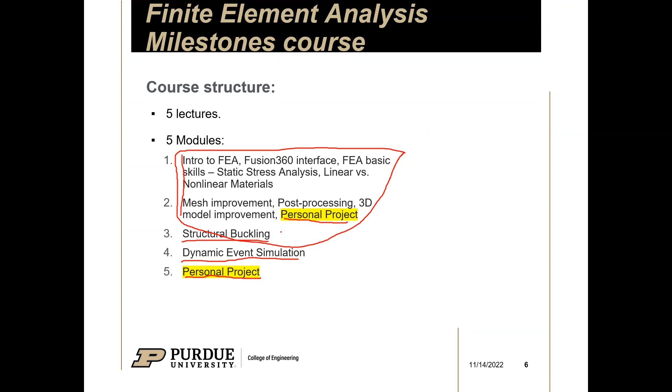And I understand that a lot of you might be doing an internship, taking summer classes and whatnot. You guys might not be very free. And because of that, I only require you guys to do these first 2 weeks and the 2 personal projects. Those are the only things you guys would have to submit. For structural buckling and dynamic event simulations, I'm going to open up a submission form, but you guys aren't required to submit anything.

All right, let me just. All right, we should be good.

So here's a bit on what I want you guys to do for both projects. Now this is very vague, and I'll get a lot deeper into it in week 2 and week 5 respectively when you guys are required to do that. But basically for project 1, I'm going to ask you guys to do a static stress analysis on a CAD model that you guys will make or you guys can find outside. And after that, I will ask you guys to do a mesh improvement on that. But you guys will figure out how to do that in week 2. So don't worry about that.

And for the second project, I'd like you guys to do a buckling stress analysis or a dynamic event simulation on Fusion 360. And why I dedicate the 5th week entirely to the second project is you will come to find that setting up a buckling stress analysis and a dynamic event simulation takes a lot more work than that of a static stress analysis. But yeah, I'll guide you guys through it. So hopefully it's not too challenging. And again, week 3 and 4, when we're going through buckling stress and dynamic event simulation, you guys aren't required to submit anything.

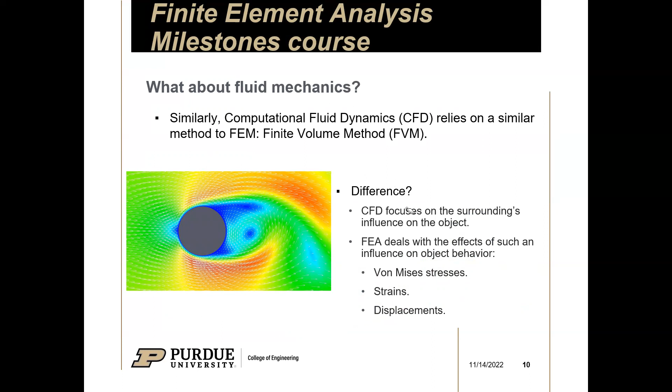Next. Okay. So you might be wondering about fluid mechanics, and that's another type of FEM called CFD, computational fluid dynamics. This talks more about how air and water will affect your CAD models. We're not going to do that at all. FEA deals more with physical properties like forces, pressure, moments, and whatnot.

Okay, I'm just going to go through this real quick. So how does FEM work? FEA and FEM are similar, so if I refer to FEM, it's probably the same thing as FEA and vice versa. How it works is you have a CAD model, and the software will split your CAD model into separate elements. Each element will be solved using partial differential equations, and they'll calculate things like displacement and stress and all that good stuff. That's basically it.

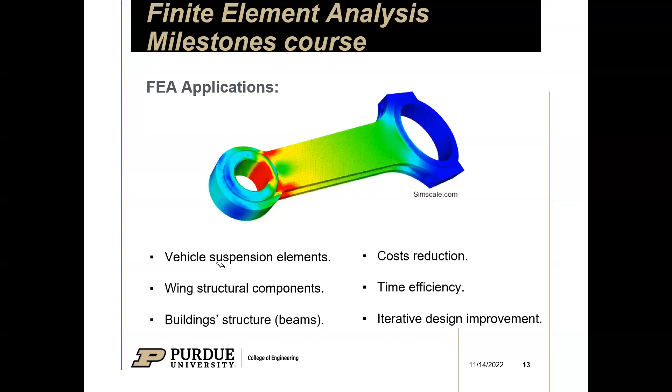And iterative design improvement is like generative design, if you've ever heard of that. Shape optimization is also a type of iterative design improvement, and that's something we're going to get into next week. Okay, cool.

So as you know, we're going to be using Fusion 360 in this course, but there are a bunch of FEA softwares out there, not just Fusion. For example, Siemens has NX, and for their FEA software, they have Star CCM. SolidWorks has SolidWorks Simulation. Autodesk has Fusion 360, and I'm sure you've heard of ANSYS before.

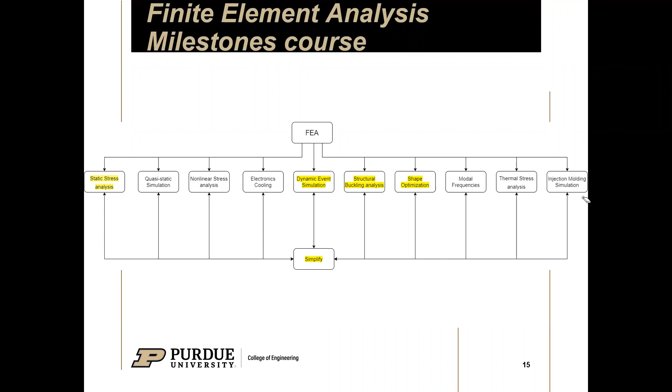But as you can see here, there are a lot of other ones you can get into. Unfortunately, we just don't have enough time; 5 weeks isn't enough to cover everything. But if you're interested, there are courses online you can take. Or if you're part of a club, you might need to do other FEA studies.

But yeah, so one of the most important parts of FEA is actually meshing. I'm sure you guys have heard of that a lot, right? Creating your mesh, this mesh, that. And basically what a mesh is: you're taking your CAD model and you're breaking it into parts. Each part here will be called an element.

And why we're separating our CAD model into elements is because now our software, or in this case Fusion 360, will be doing a bunch of partial diff-EQ on each element to figure out what the displacement at this specific element is, to give us accurate results basically, and sort of predict what's going to happen to our CAD model in real life if we were to subject it to certain forces or moments and all that.

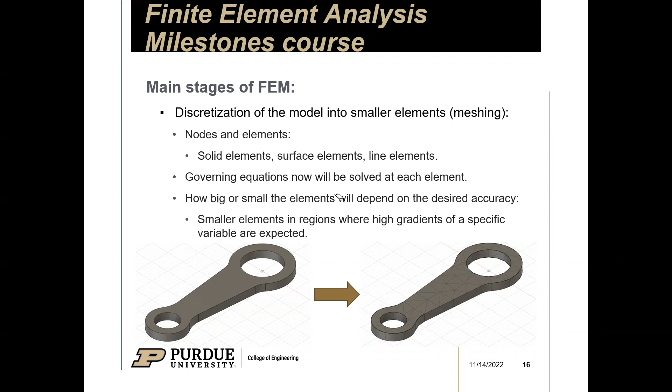So if you guys see here, we can change our mesh settings to make our studies more accurate at the cost of time, right? So I'm going to show you guys what I mean. So here's our CAD model. This is the roughest mesh we could get.

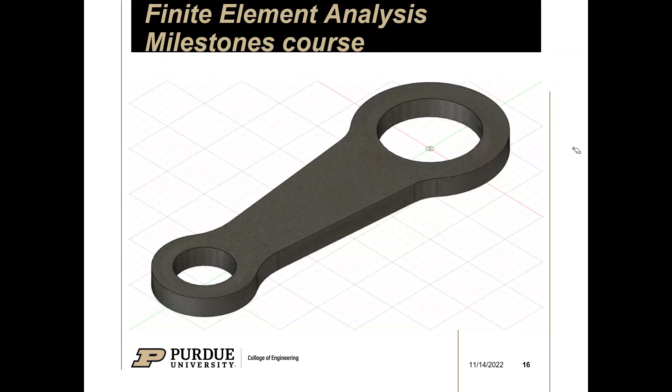But if we want a more accurate result, we could split our model into a lot more tinier elements. And we can do that up until we have this, where it's very hard to see each element now, because there's probably like millions of them. And Fusion will take care of everything basically. For every dot you see probably, Fusion will run a bunch of partial diff-EQ equations on it. Sounds like a nightmare, but thank God we don't have to do that, right? So that's the point of this course.

All right, so another important thing within FEA is for us to define our materials. Of course, if we're going to run a study on our model, Fusion needs to know what exactly we're dealing with, right? So some important properties that Fusion needs to know are a material's density, Young's modulus, Poisson's ratio, and more. And you guys don't have to search it up yourself, because Fusion sort of has a library with a bunch of materials already. So that's good for us.

And of course, next to that, we have to define our boundary conditions, right? For example, the part earlier, let's say we're dealing with this. If we don't fix anything, if this is just free and we add a force here that pulls our part to the left, nothing's going to happen, because if you think about it, the entire model is going to move along with it, right?

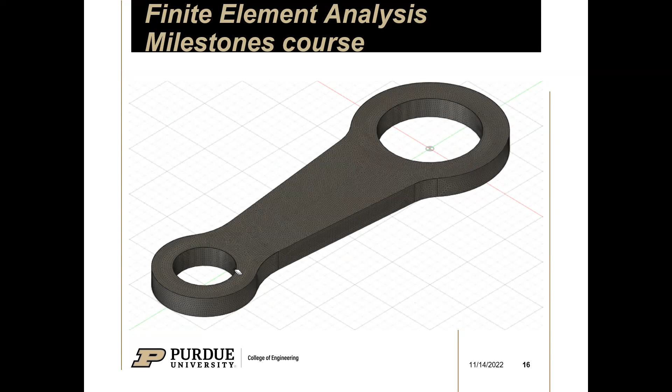So what we'd like to do is fix a part, or make a pin joint or something. So let's say we fix this big hole over here and we add a force here that pulls to the left. Now we'll see something happen, like maybe we'll see stress buildup over here, and some displacement over here. But yeah, you have to define your boundary conditions when you're doing an FEA study. Constraints and the loads are probably the two most important boundary conditions you can have.

And contacts aren't very common, especially not in this course. Actually, scratch that. It's quite common, just not in this course, because contacts are used for an assembly. Say we're dealing with a table: contacts let Fusion know the leg and the table itself are in contact with each other, right? So that's basically the entire point of contacts, but we're not really going to deal with that unless you guys choose to do so for your personal project.

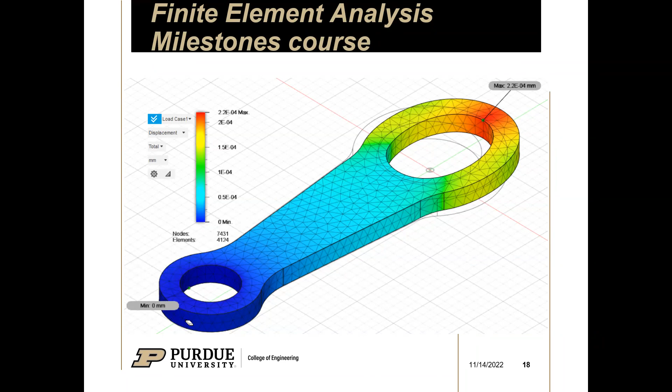And I just want to say that this is exaggerated. You guys see the number here? It's a very small displacement. You probably can't see it with your own eyes, but Fusion likes to exaggerate it, so you'll know, if you keep increasing your load, what exactly the displacement will look like, right? And what's nice is, as I said earlier, you can see the maximum and minimum, and this color gradient really helps you visualize your results, basically. But yeah, sorry.

And some additional steps. All right, so here, shape optimization is something we're going to do next week. What it basically does is when you get your results like this, and you have a safety factor of 15, which is to the point where it's too good. We're usually looking for somewhere around 1.5. So 15 means you're really safe. Fusion will give you recommendations here: use shape optimization to remove unnecessary material. We're going to get into that next week.

What shape optimization basically does is Fusion will run the study on your model, and it'll show you, using a new mesh, parts that you can cut away that will decrease your safety factor, but will help keep you within a range you specify, right? And another way you could decrease your safety factor is, of course, using weaker and cheaper materials, like switching from metal to plastic, right? Cool.

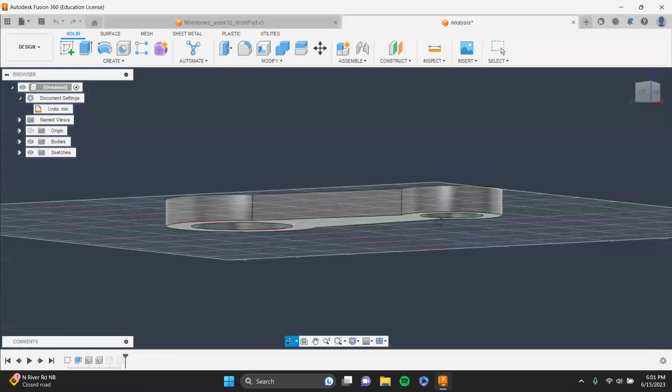So now we're going to analyze the 3D model. Just by looking at this model, you guys tell me where the weak zones are. If you guys didn't know, stress likes to build up usually on edges and corners, like these points over here, sharp corners here. Stress builds up there. And a good way to minimize stress and minimize your weak points.

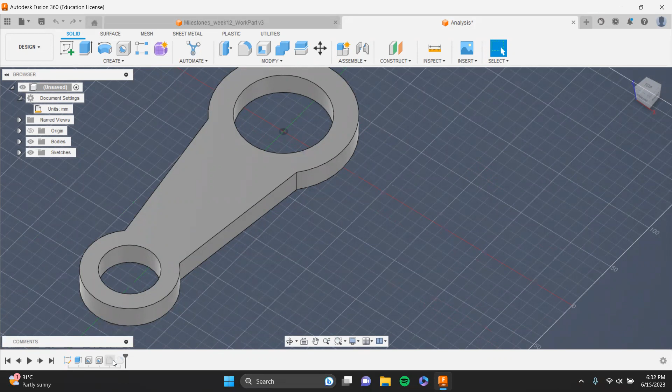Down here, we have two fillets that are suppressed. If you guys unsuppress that, you guys will see that now we have curves. Basically, what this does is make sure that we have no stress buildup at any specific point within the model, right? That's basically all I wanted to show you. Please do unsuppress these two features, these two fillets, when doing your analysis in a bit.

I'm gonna keep going here. Okay, sorry, I went through that already. Okay, now's the fun part. Let's start creating our study. So first thing we want to do is switch our workspace from design to simulation and create a new study. I'm gonna go through along with you guys. So you're gonna go here. You're gonna switch from design to simulation, right?

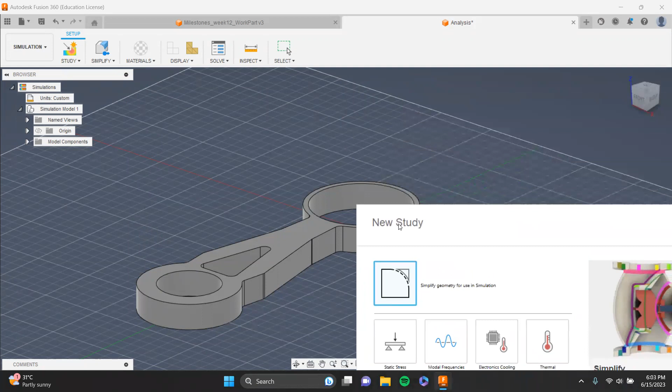So I made a mistake sending you guys the file, because if you go to the simulation here, you can see that it's a whole different part we're working with, right? That's a part that I edited last semester. So we're gonna fix that first. What we're gonna do is go to simplify model here. If you guys can see on the bottom, there are these sort of edits to the model.

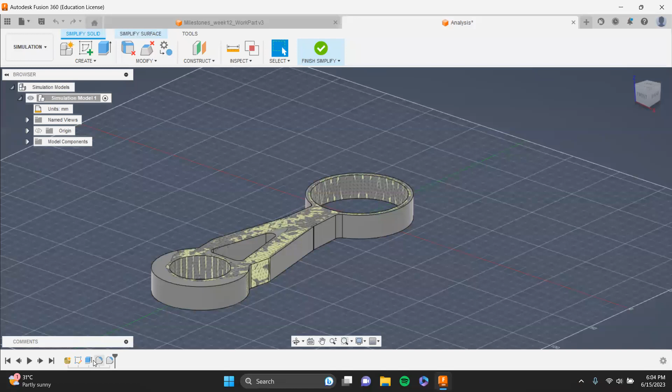Please do delete all of them. You're not going to be working with this part. We're going to be working with just the ordinary part, the one you would see in the design workspace. And once you're done with that, please do finish simplify. Up to this point, do you guys have any questions? Okay, cool. Doesn't seem like anyone has any questions, so I'm going to move on.

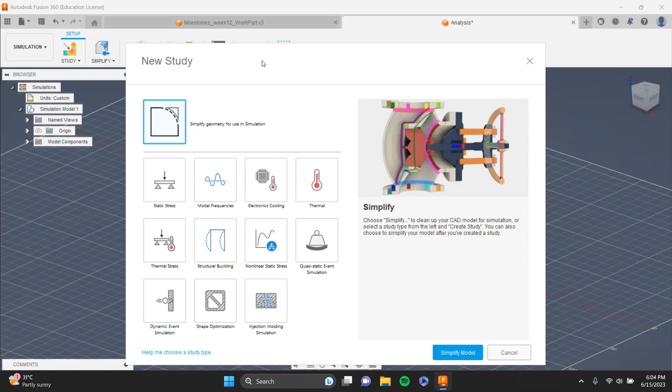You can see here there are a bunch of studies you can do through Fusion. Static stress, which is what we're going to be doing today. Modal frequencies. If you're dealing with electronics and want to see thermal stresses, you can do this. Week 3, we're going to be dealing with structural buckling. Week 4, dynamic event simulation. And throughout weeks 2 and 3, we're going to be doing shape optimization, but we'll deal with that next week. For now, I just want you to click on static stress and hit create study.

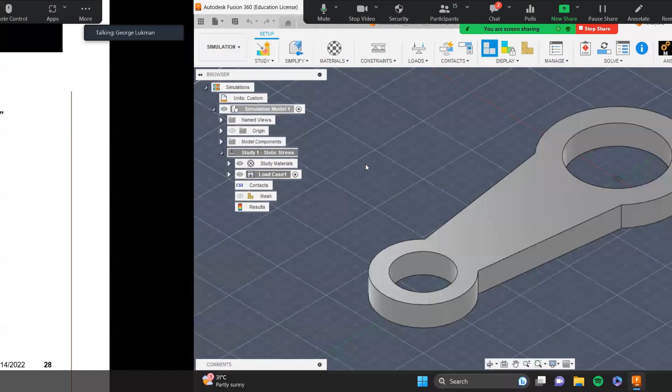And I'll go back to our slides for a moment while you guys are doing that. Cool. And again, I showed you guys the simplify tool, and why it's useful is you guys can change your model up without actually changing the actual model on your design workspace. Like you saw earlier, in our design workspace, we had this sort of basic model. And right as we entered our simplify workspace, it was a whole different model, right?

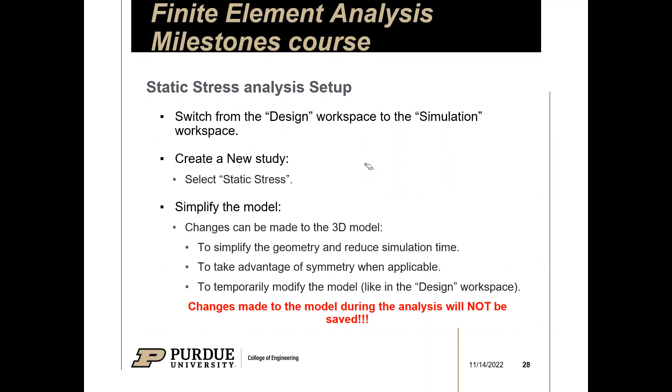So take advantage of that when you guys are done with this course, or using FEA now for your clubs, jobs, whatever you guys are going to use it for. Take advantage of that, play around with it if you guys want to change some things up just a little bit without actually changing your CAD design, right? That seems very useful. But yeah, okay. There you go. Cool. Let's keep going now, right?

Alrighty. Now we're here. Okay, we go to materials here. This one over here. We can click the drop down. There's a bunch of things you guys can go look at, but this is enough. Study materials, click. Now we see here our study material and from what library it's in. But we'd like to change, okay, and there's like a bunch.

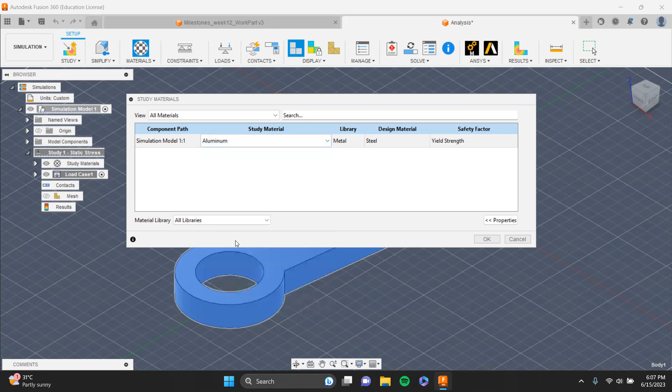We'd like to change it now to aluminum, right? Just change it to aluminum. That's what we're gonna be using. Click OK. It should turn white. That's the color of aluminum. Another way we could do it is by hitting study materials here. It's going to take us to the exact same interface we saw earlier. But yeah, you guys can pick, right? It's the same thing. Once you guys are done with that, you guys are good. Let's keep going now.

And the next thing we'd like to do is apply our constraints, right? We'd like to apply our fixed constraints so that when we apply a load, something will actually happen. What we're going to do now, we're going to fix the interface of our bigger hole, right? And we want to make sure that it's fixed in the X, Y, and Z axes. I'm going to show you guys here actually. So you want to go to constraints here. You guys can drop down here, but for the most part, we're just going to use the basic constraints. So just click on that.

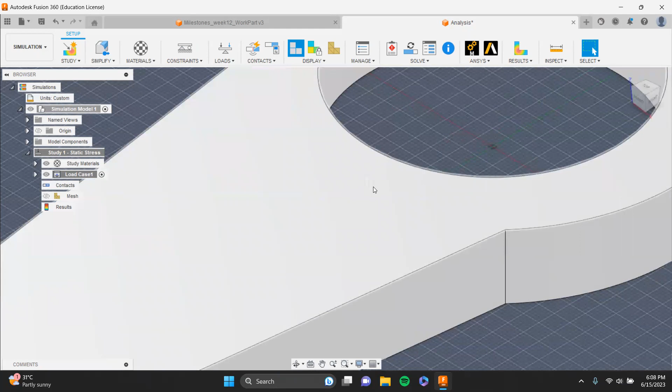And you guys can see the different types of constraints you guys can apply to your model. We're just going to use the fixed. We're going to apply it to the inner circle of the bigger hole. I'm going to click that. Make sure all three axes are highlighted. We're going to click OK. How you guys know you did this right? Because if you zoom in, you guys can see this lock is actually locked. Probably hard to see. Let me do this. Cool. Yeah, it's probably easier.

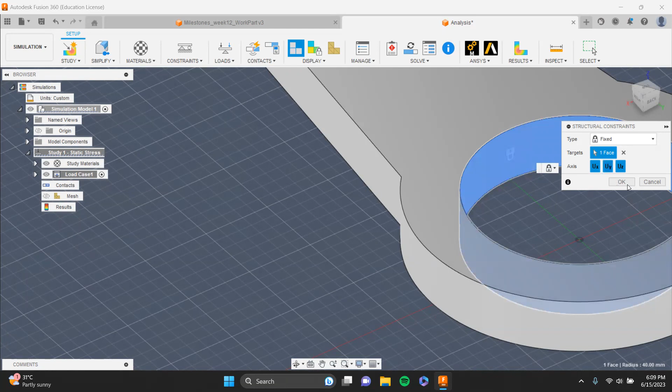Now, if you guys did this wrong, say I just fixed the X and the Z axis, what you guys will see is your lock is unlocked. What that means is it can still move in the Y direction, right? But that's not what we want. So let's fix all three axes. Cool. Let's just go back here. Alrighty. So now we're going to move on.

And for the angle, it's a bit different; everyone might have different ones. So I'll just show you guys what the direction of the force is supposed to look like. Okay, so now we're back here. Again, the interface of your bigger hole should have a lock on it, right? And that's how you do it. So go constraints, fixed, and select that.

We've done that. Next, we're going to apply our loads again. Use the drop down. Again, it's this introductory course, so we're going to use the most simple one. From type, pick force, right? Not remote force, not moment pressure. We'd like to use force. For our target, please pick the interface of our smaller hole. We click that. And this is the direction we'd like to use, right?

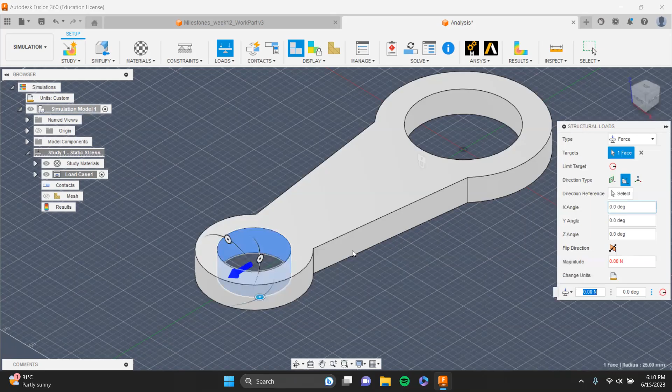You guys can see earlier, it says we'd like the X angle to be 180 degrees. But if your direction's already pointing outwards like that, please do not change it. This is what we'd like to see, right? Out. If you guys have a force that looks something like this, then please do change it or use the dragging tool here to drag it outwards. Okay, this is the direction we'd like it to be in.

And we'd like to change our magnitude. We can change our magnitude through here or here, doesn't matter. Make that 1000. We can change our units, by the way, but let's keep it in newtons right now.

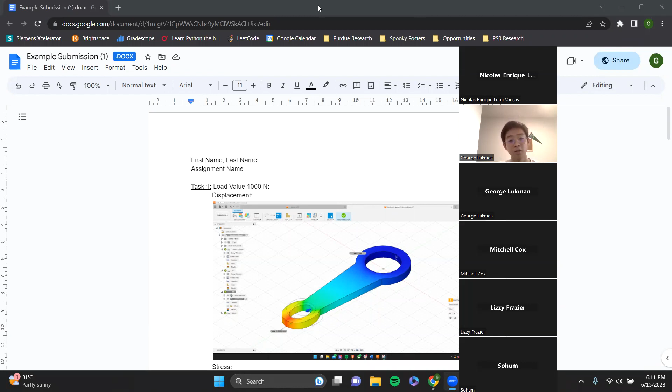Click. Can I get a raise of, oops. Yeah, actually, can I get a raise of hands on if you guys are done with this step? Actually, thumbs up or a raise of hands would be good. Yeah, okay, I see you, Nick. Sohum, thank you. All right, thank you, guys. Thank you so much. All right, it's like we're doing well here. What? Okay, sorry about that.

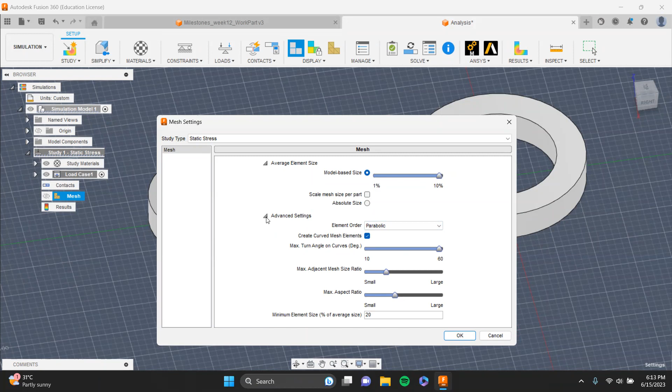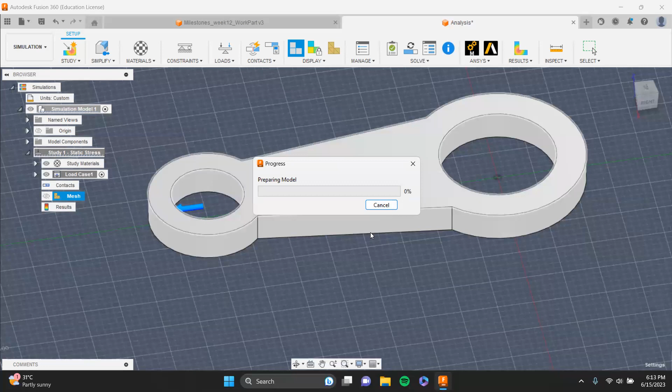But for today, we're just going to be dealing with model-based size, and let's keep it at 10% first. We're going to click OK. Now, we're going to click this button here. It's basically going to create the mesh for us. Might take a bit. Cool. Now, if you guys can see here, our model is now split into separate elements. Each triangle here is an element, right?

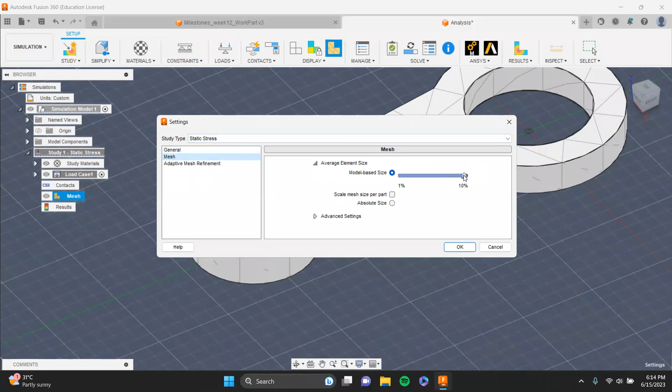Cool. Now, we could also go to mesh from here. Drop down over here. Let's go to local mesh control. That's if we want to change our mesh at a specific designated area, like if we'd like to change our mesh here or here. That's not what we're going to be covering today. We could simply go to settings, click here, and down here we have mesh. We could also edit our mesh through here, change it to 1%, right? And just click OK here.

And if you guys can see here, Fusion is giving me a warning. It's telling me it's out of date. That's why we'd always like to generate mesh. Every time you change your mesh, just make sure you right click here and generate mesh, just to be sure you're dealing with the most recent mesh you picked. If you generate mesh here, this is just an example, at 1% it's going to be a lot finer, as you'll see in a bit. But the downside is when we analyze our study, Fusion's going to take a lot more time to solve it. Look at that.

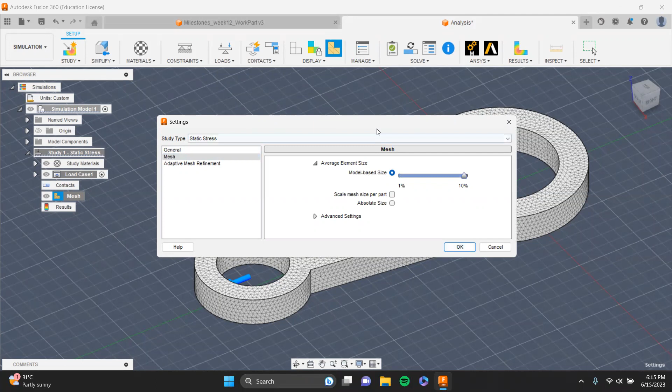Now, each element is this individual triangle here, and Fusion has to solve for a bunch of them, right? But please change this back. Actually, let's change this back to 10%, so your studies won't take a long time to solve, especially since we're dealing with a part that's not too big. We don't really care how accurate our results are, though I will be asking you guys to play around with the mesh in a little bit. But for right now, just keep it at this 10% mark because it's enough.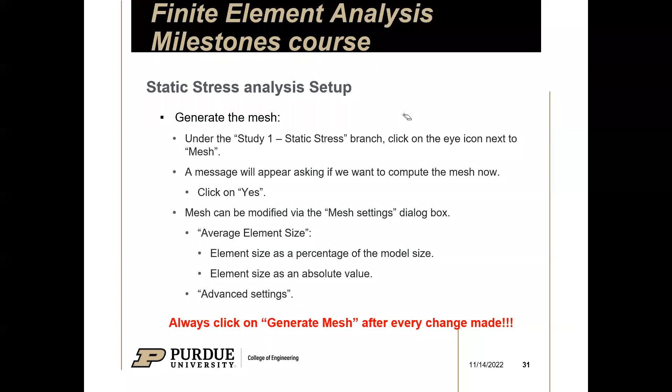Cool. So next thing we'd like to do is to use our pre-check tool, which is one of the most important and I guess one of your biggest friends when using Fusion's FEA. And why that is, the check tool actually lets you know if you're good to go, right? So if you set everything up right, this is what you should be getting, which is a check. This means you're good, you're ready to solve.

Whereas if you forgot to do a step, this is the interface you'll be introduced to. And Fusion usually is able to catch what you're missing. For example, here you're missing a structural load, so Fusion will be like, hey, maybe you're forgetting to set up your load. But if I swipe back here, we look at our pre-check tool, which is over here. You can see it's green, right? Of course, if you hover over any icon, it tells you what it does. But all right, back to it.

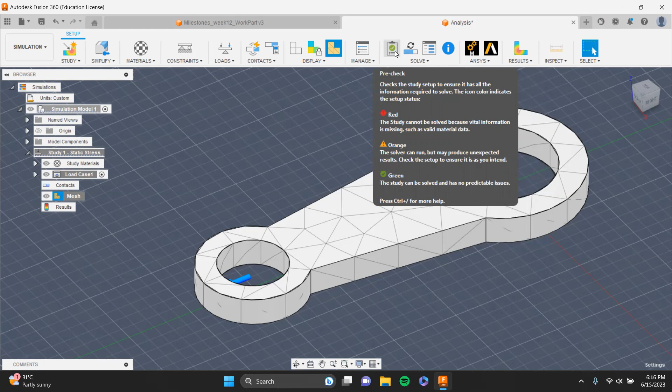Our pre-check tool is green, which means we set everything up right, and Fusion's telling us you're good to go. We can solve whenever we're ready. It's not giving us any warnings at all, so we're ready to solve. So once we're done with that, we're gonna solve. Solve is right here next to pre-check. It should say ready. Once you're done, just click solve one study.

It's gonna ask you to name it. Just name it whatever you'd like. I'm not too picky because I'm not gonna ask for the file. But yeah, it's going to give you the status. By the way, it might take about 5 to 10 minutes, so please be aware of that and please be patient. But that's basically how you would set up a static stress analysis.

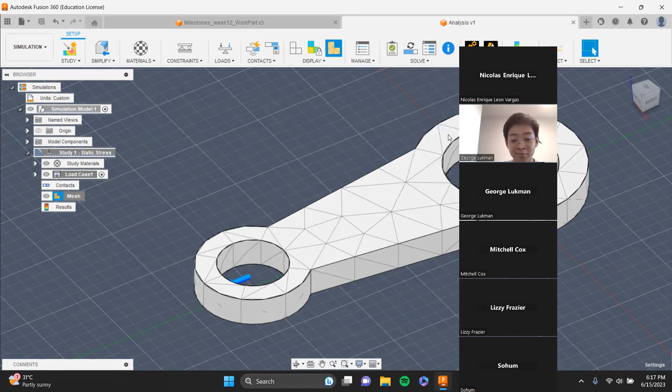Up to this point, does anybody have any questions? Probably went through that really quickly, so if you do, I don't blame you. Okay, cool. Looks like we are good.

And by the way, if you want to check on your study, like earlier, I just clicked X. Now I don't know where to find my study. One thing you could do is go to job status. It shows you that you're 30% done. Another way you can check is here. It's a lot less intuitive. You can't tell that's 30%, but it shows you that it's still in progress. So go back here and okay. Let's wait for this to solve so I can show you the results tab. It shouldn't take too long.

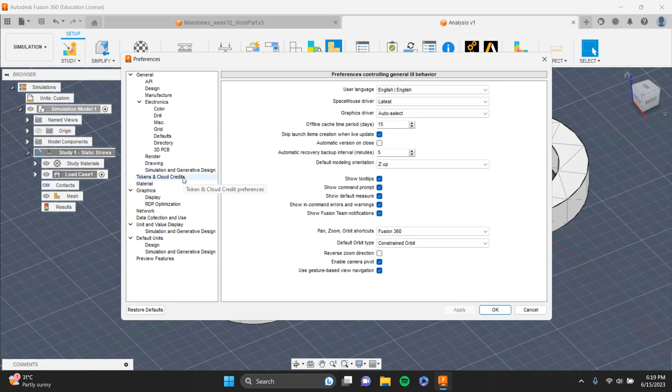So while we're waiting for that, please follow along because this is very important. Please change your account here. Click up here and go to preferences. Once you're in preferences, please go down to tokens and cloud credits. Up to this point, are you able to follow? Because this is really important. Give me a thumbs up if you're here. Cool, thank you. All right, I'm gonna keep going.

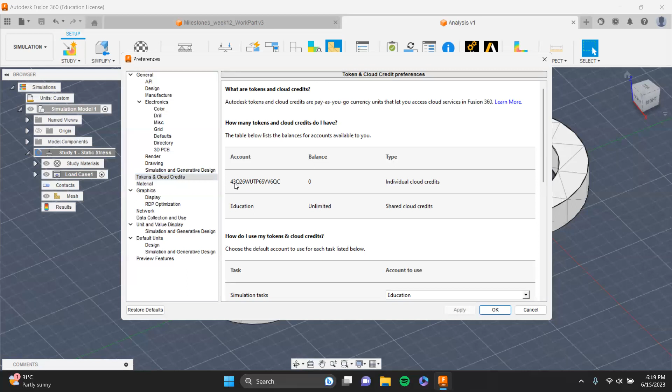Once you're here, you can see you have your personal account, which is a bunch of weird combinations of letters and numbers. And as you can see, my balance is 0. If you're using the FEA tool for the first time, maybe you should have like 5 or 6. But you can see here, you have another account called education. You would get this account if you signed up using your Purdue email, which I'm assuming all of you have. With your Purdue email, you'll get an education account with unlimited balance.

Now, why this is important is because usually this is set up as your personal account by default, and you will need to change it yourselves to education. So just do the drop down, instead of having this 4-3Q or whatever combination you have, please switch to education so you have an unlimited amount of credits.

And I'll wait for like 5 seconds. And if you guys are done with that, can you please give me a thumbs up so I know you guys are able to do so.

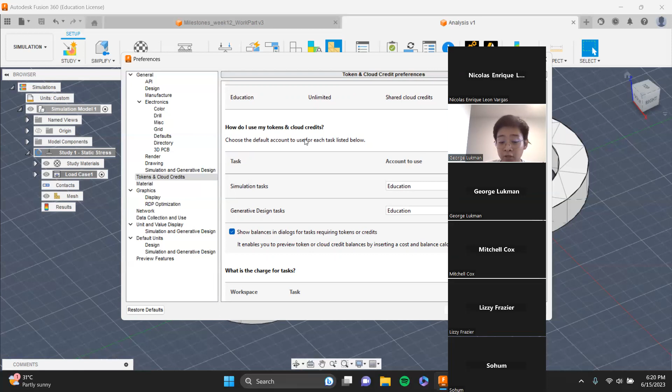And this is important because next week, when we do shape optimization, we're actually going to need about three cloud credits per shape optimization, and we'll need to do like 4 or 5 shape optimizations. So if you guys don't switch it to your education accounts, by like the 3rd simulation, you guys will be out of cloud credits, sorry. But yeah, thanks for the thumbs up, guys. That's really important that you guys switch to this.

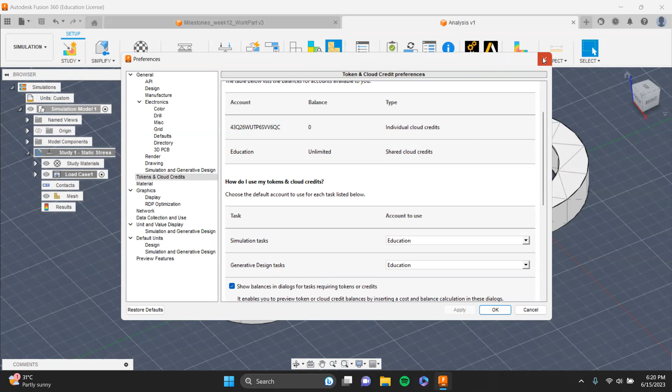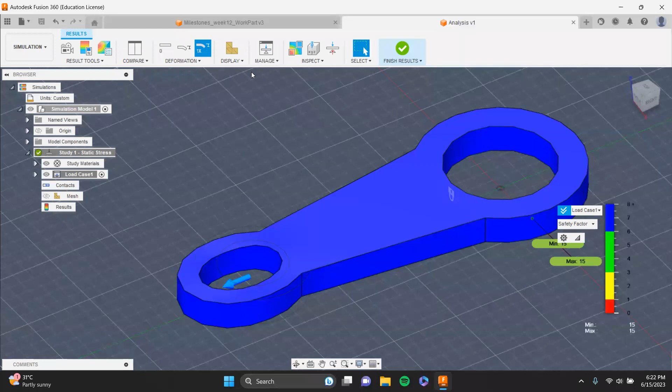Okay, and I'm gonna walk you guys through how you guys can use each and every one of them because it's very important. And I guess I could use displacement because it has the color gradient, which makes it easy to see. Now, first things first, you guys can take a look at displacement, safety factor, stress, reaction forces, and more. But for the most part, in this class, I only want you guys to go through safety factor, stress, and displacement because those are what I'm requiring you guys to send me for your submissions, right? I want to see safety factor, stress, displacement. Okay. And then results tool here.

Bunch of things you can do, right? You guys can play around with the slider here. So, yep, you guys can do that. And again, here you can check the undeformed, actual, and adjusted. So here's what I want to show you guys. So this is our undeformed model, right? This is what our model will look like. I'm gonna go to our view here. And if you guys actually see the actual, you guys can't really see a difference. Now I'm gonna zoom in a lot here, just so you guys can see maybe a little bit. That's how much deformation our model actually has with 1,000 newtons of force, right? It's not that much, but somehow Fusion showed us this, right?

So please be sure to switch to actual. Or, yeah, okay, sorry, someone put something in the chat. I will take a look at that in just a bit.

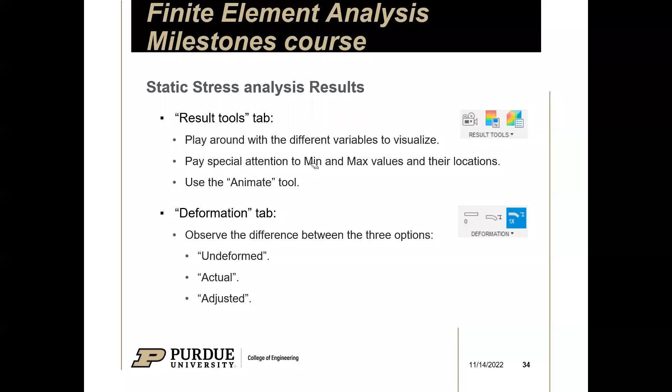But yeah, so please be sure to switch to actual if you guys want to see how a specific force, pressure, or moment will affect your model, right? Cool. And is there anything else I was missing here? Oh, the animate tool. Yes. So you guys can also animate here what will happen to your model, right? There you go. Kind of cool. I don't know. But yeah, those are a few things you could do with your results in the results tab here once you're done doing your study.

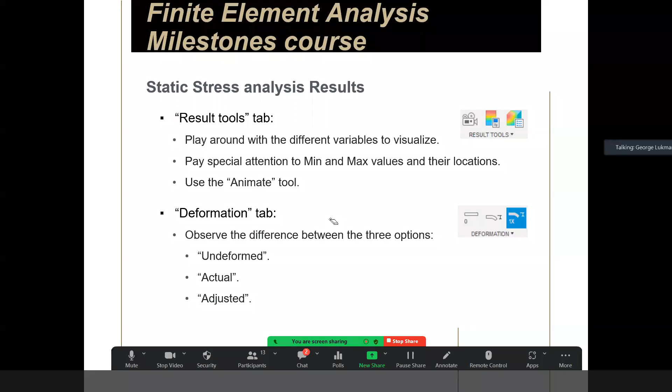Okay. Other things you could do here, oops, sorry, with your results are you could hide your minimum and maximum. You guys can try it out, but please turn it back on because I'd really like to see these values when you submit your work. And of course, you guys can create a point probe here. And here you can actually see what the stress is at this certain point.

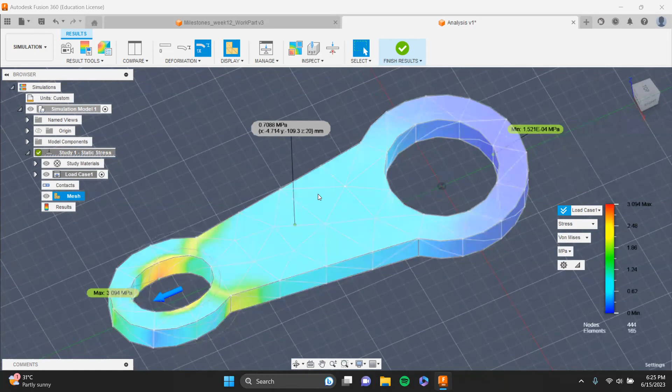And why that's possible is because earlier, sorry, not Fusion, earlier we created a mesh, right? We created these meshes here. So Fusion is able to tell at this point, at this quote unquote element, what the stress is or what the displacement is and all that, right? But yeah, those are a bit of what you can do with the results tab in Fusion.

All right, so now we are going to go to our assignments. So what you guys saw earlier, I'd like you guys to do 4 things. Well, 3 things in total. If you guys followed along with me as we created and set up the study, this counts as 1. I'd like you to provide me 3 screenshots. So 1 screenshot of the safety factor, 1 screenshot of the stress, and 1 screenshot of the displacement, right?

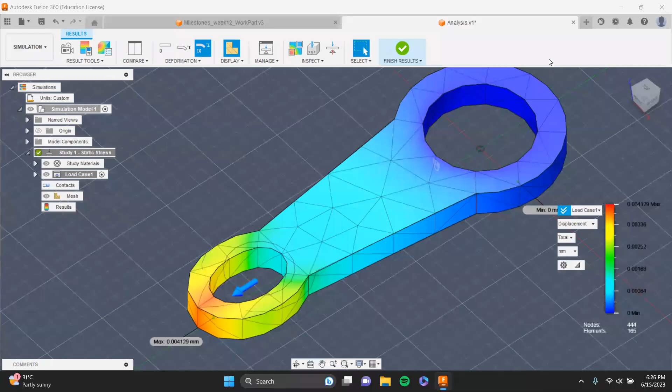Once you're done with that, click finish results. And please don't edit this, right? Don't go down here, go to your loads and edit your load, right? Please keep it as is. What I'd like you to do instead is right click on that and clone study. Once you've cloned your study, everything will be exactly the same, right? You create your mesh here, it'll be the same.

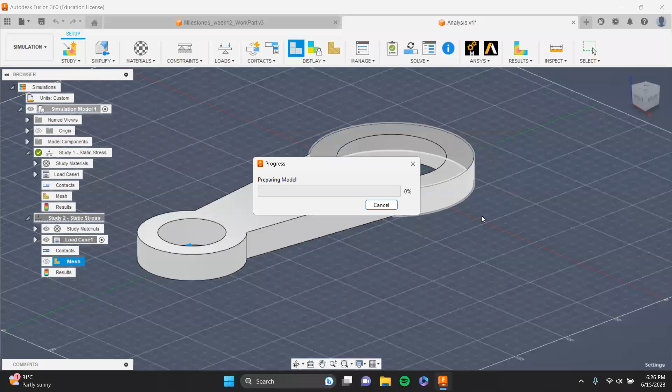Sorry, give me a sec. But again, we'd like to change the value of our load to 5,000 newtons. And I'll let you guys figure out. No, actually, let me show you guys how to do that. And for the rest, I'll leave it to you guys to figure out how to do it. And I'll be back in about 5 minutes to show you guys how to do it. And please do

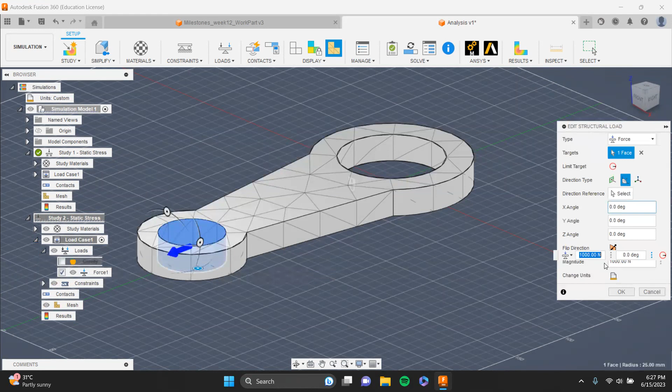screenshot the results. So once you've cloned your study, right click on study one and clone study, right? You get this. And then once you're on your study two, you'd like to click this drop down, go to loads, drop down again, and go to force. You want to edit. You can double click or click this edit button here. And you want to change your magnitude now to 5,000, right? That seems very simple. Enter 5,000, you should be good.

And earlier, I taught you guys how to change the direction of your load, right? Change the angles, basically. And so there's no confusion, I just want to let you guys know. This is one. So 1,000 earlier, like I mentioned. You do this, give me 3 screenshots, good. Change the load to 5,000, give me 3 screenshots of this, good. Now change it to 10,000, give me 3 screenshots. That's good. So that's 9 in total.

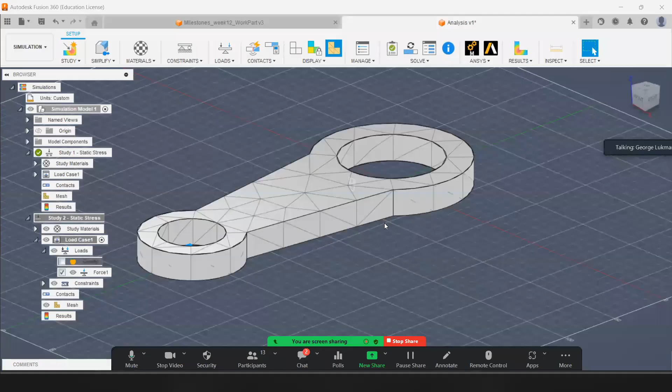And then I'd like you guys to clone another study of 10,000. And instead of changing the magnitude, change the direction, right? Change this direction to include a Y angle of 90 degrees. And again, I told you guys earlier that the angles might be a bit jumbled up based on your own Fusion. So here's the direction I'd like you guys to have your 90 degrees in the Y-axis to look like.

Right click here, edit structural load. I'll do it 2 ways, so it's intuitive, to have it as 90 degrees here, which you guys can use the slider here, around here, 90 degrees. So it's pointing downwards. How do we fix the model to the correct one again? Okay, so yeah, let me show you guys how to do that. And another way to do it is just by manually typing 90 here.

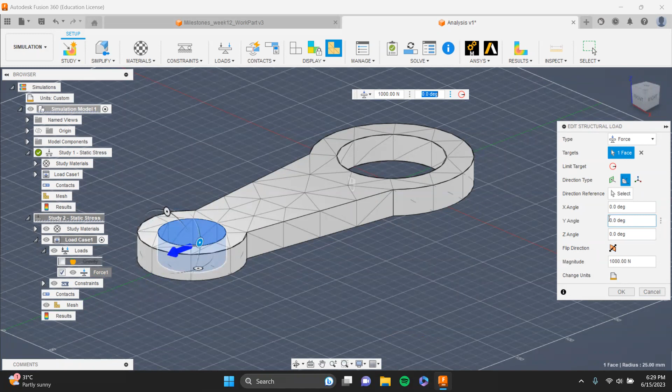Okay, so how do we fix the model to the correct one again? Are you talking about the constraint? How do we constrain the model? No, my 3D model is the weird one with the hole in the middle. Oh, okay. I see what you're talking about. So how you do that is you want to go to simplify here. And when you go to simplify, because I removed it, there's nothing for me, but you should see a fillet and an extrude down here. Do you see that?

Oh yeah, I see. There's 2 fillets and 1 extrude. Cool. If you could right click on each of them and then just delete them. Just the fillets? All of them. Oh, the fillets and the extrudes? Yes. Did that work? Okay, yeah. Awesome. That worked. Cool. Thank you.

I'm gonna give you guys about 15 minutes to set up your studies because you just have to clone and change the loads. And give me a sec here. I'm just gonna reply to the chat real quick, and then I will show you guys how I expect you guys to submit your submission.

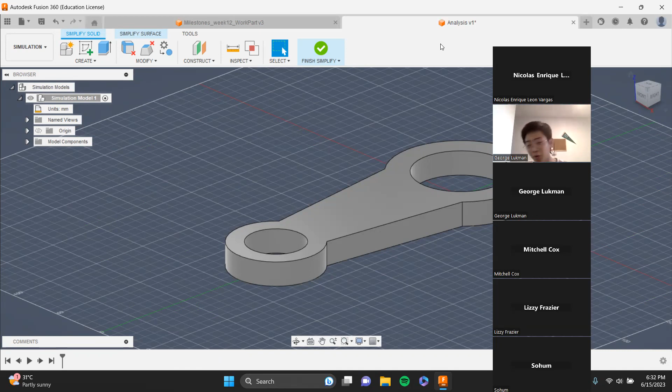Okay. And could you please give me a thumbs up if you guys got that covered? I think that was Thorin. Really? Okay. Thank you so much. Okay. If you guys still have a problem with that, please do let me know in the chat. Oh, I see. Okay, no problem. Yeah. If you boot up your Fusion and it still doesn't work, please let me know.

But right now I'm going to show you guys how I expect you guys to submit your work for the next 5 weeks. So I'd like you guys to put all your screenshots in a document. I don't care what the title is, but I'd like you guys to follow this format. And by the way, if you guys can't get all of this within the next 5 minutes that I'm going to be explaining this, please don't worry. I'm going to be posting this in a Slack message tonight, along with the link to the recording, so you guys can watch this lecture again if you guys did fall behind, and for all of you that aren't here today with me. So yeah, here is what the format is.

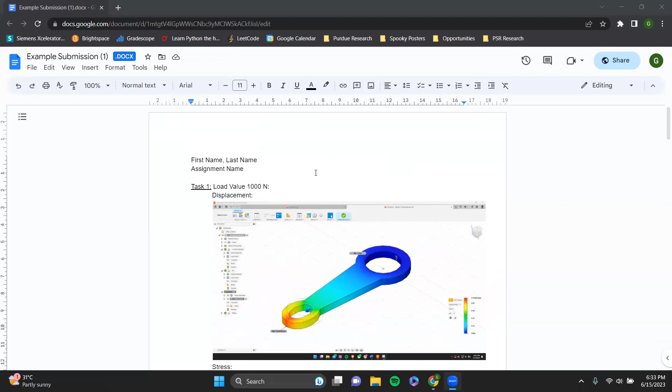So of course, first name, last name, assignment name, just put week 1, week 2, week 3, week 4, something like that. Task 1, I'd like you guys to specify what screenshots I'm looking at exactly here. So 1,000 newtons, show me. Please put displacement, stress, and safety factor. And it should be a bit easy because it shows right here. There's displacement there, stress there. And one thing I do want to note is for stress, make sure your stress is at von Mises, right?

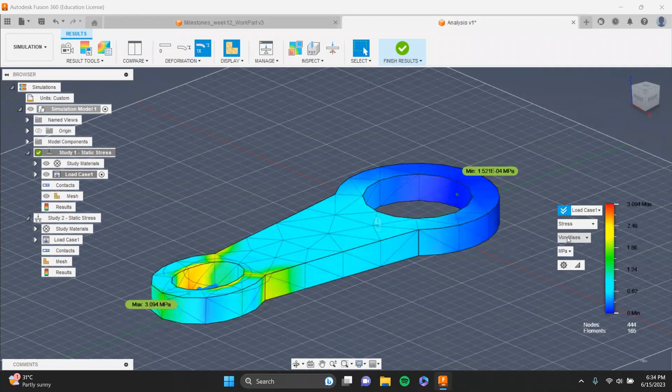I'm going to go back to Fusion really quick to show you guys. And by the way, if you guys are back here and you'd like to see your results again, you don't have to solve it again because it's already solved, right? Sorry, this one isn't solved yet, sorry. Yeah, okay, so over here, you don't really have to solve it. Fusion doesn't really let you solve it anyways. Just go up here to the results tab, simulation results, and it goes back to where we were earlier today. And again, for stress, make sure you guys are at von Mises, and for your units, make sure it's at megapascals, right? So there's a bunch of this here, but please keep it at von Mises.

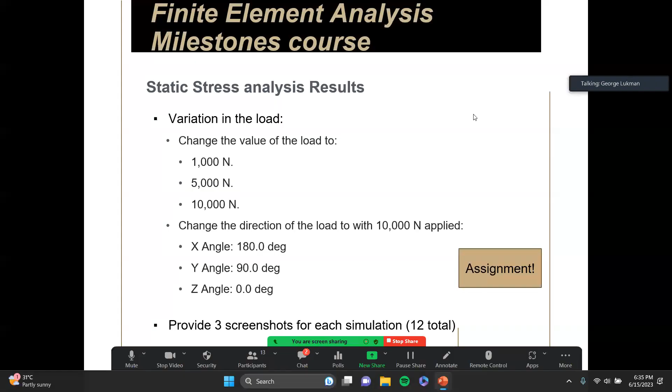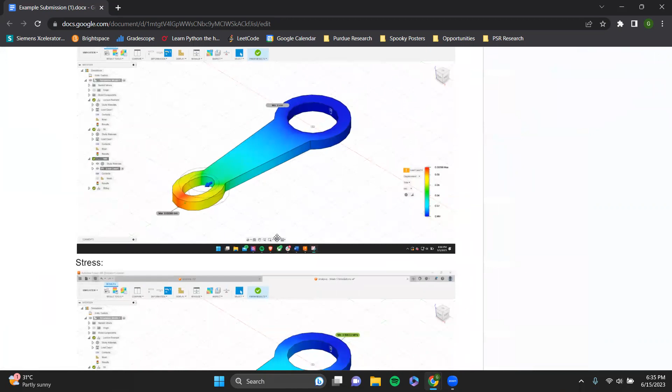And one more thing I'd like you guys to note is if your values don't exactly correlate to mine, don't worry, you guys probably aren't doing anything wrong. But I just want to make sure that it's within an acceptable range, right? Okay, so back to the document. So yeah, displacement, stress, safety factor, those 3, I'd like you guys to screenshot, right? And some important parts of your screenshots are that I'd like to see the date and time, right? Please don't crop your screenshot so it's, I'll show you guys what I mean here.

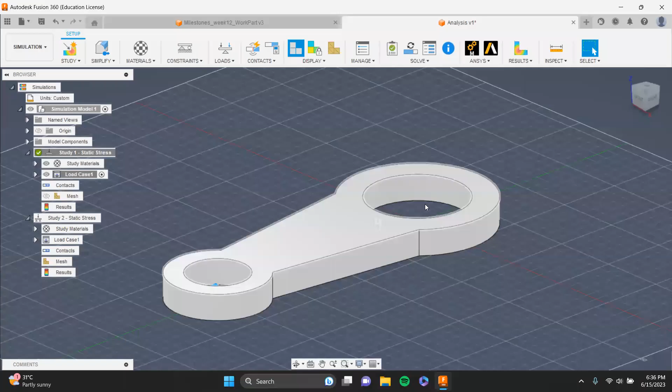And I know that was quick, so I'm just gonna go through it on Fusion, show you guys what I mean, right? So here, you guys can see down in the bottom, I have my timestamp here. So that's good there, right? Let me go to results here. I have my minimum, maximum. Again, if you guys accidentally turn it off, it's right here. Just click it, and you guys should have it back, right? So please have this too. Have your timestamp and have your legend here, right?

And yeah, that's how I expect you guys to submit your work every single week. I will wait probably about 5 more minutes. If you guys are done with this, please do give me a thumbs up so I know you guys are done. I don't want to wait too long. We have just a bit more to go through before we'll be done this week. This week's probably not going to be as long as the other weeks.

And I just want to give you guys a quick heads up, for all of you watching the recordings who are planning to join next week, and all of you here, of course. Next week's going to be a bit tougher, I'd say, because I counted in total, you would have to submit 59 screenshots. So bear with me here. I'm trying to contact Milestones to see if there's any way I could decrease that number, just because in the previous semesters, that's how we've been able to grade you guys, by your screenshots.

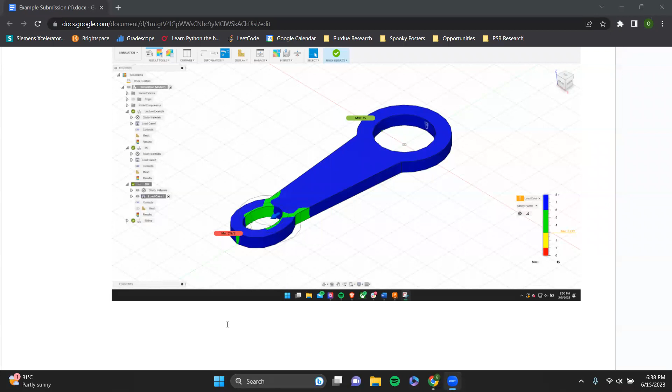Yeah, okay. So sorry, let me go back here. The question is, what constraints do we use? Right, so let's go back here, finish results. I'm gonna go to study 2 so I don't mess up the study I'm done with. So for our constraints, we'd like to keep it as we did for study 1. I should have mentioned that. For all of the variations you guys are gonna do, make sure you guys fix this bigger hole, the inner circle of the bigger hole.

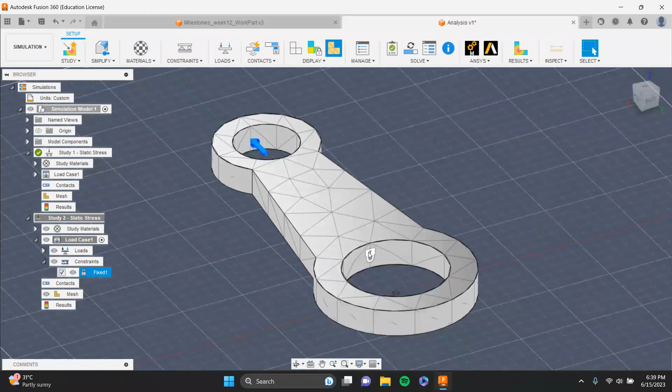For every one of them, make sure they're fixed on these 3 axes, right? So when you're dealing with the 1000, it's fixed here, 5000 fixed here, 1000 fixed here. Once you guys switch the load up here 90 degrees, please do keep it as a fixed constraint within this interface of the big circle, and make sure it's fixed on all 3 axes. Thanks for the question, Vaishnav.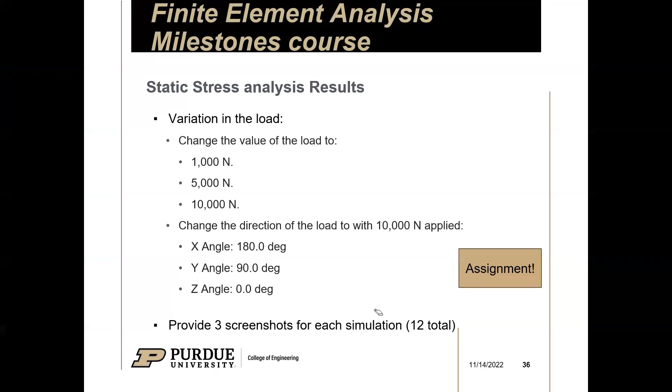Yeah, let me go back. Sorry. Let me go back here and let's wait about how many minutes left we have? Yeah, like 2 more minutes.

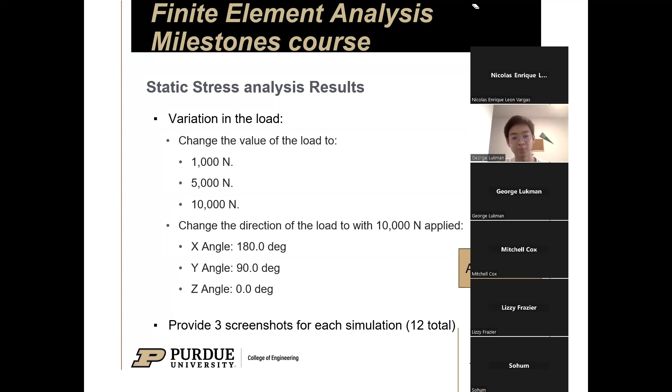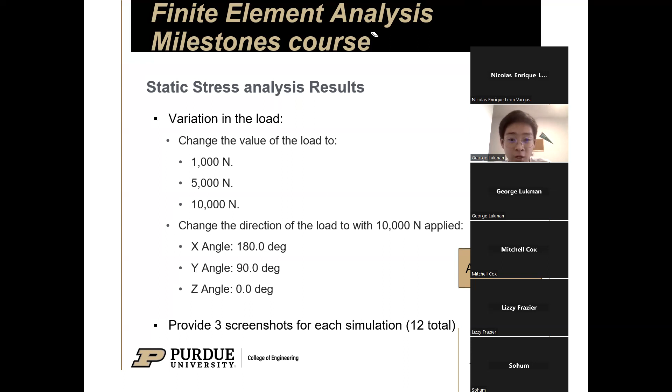Okay, cool. Hopefully you guys are done setting it up. I know waiting for your results to come up might take a while, but that shouldn't be a problem. You guys can keep your laptop up and just do your screenshots whenever. Let me actually show you guys. Make sure you guys save your studies here, so you guys can close it and come back to it and it'll still be there. But I'm gonna move on with this. I don't think there's much left. But yeah, let's see.

Okay, the next thing we'd like to get into is linear versus non-linear material, right? Let's say you'd like to run an analysis on a wooden table, right? Wood is a non-linear material, right? Some of its properties in the X and Y and Z directions might not match up. A very good example is actually their Poisson's ratio. So how exactly would you do a study on a non-linear material? Now for this, there are two ways to do it. I'm going to show you guys right now.

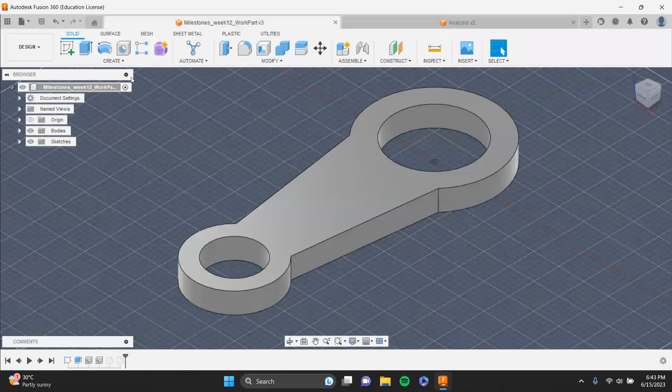So actually, let me go through it. Okay, I guess I didn't write it down. Sorry about that. So there's two ways you guys can actually do a study on a non-linear material. Now, one way, which I would say is the better way because it's a lot more accurate, is when you go to study here, instead of going to static stress, there's a specific one for non-linear material. So here.

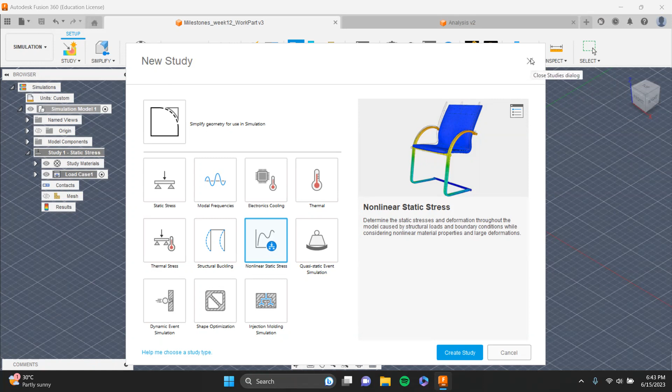So that's a better way to do things, but it takes a little more, I wouldn't say skill, I would say experience. Some boundary conditions you might need to change. So I'll just go for the more simple one, which might not be as accurate, but you guys can use this as a very rough estimate on results when you guys are doing your analysis. And how we do that now is by going to our materials, more specifically, I'm going to show you guys actually.

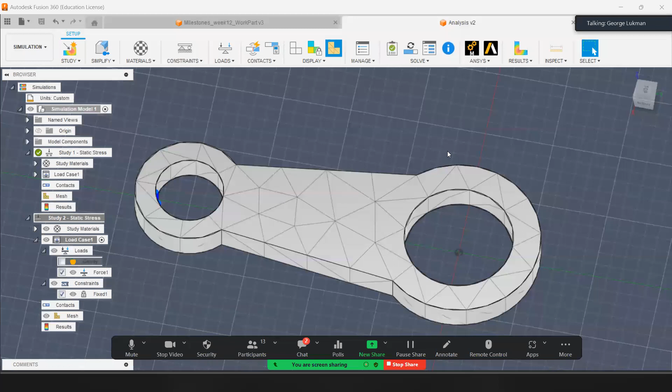So how would you know if you're dealing with a non-linear material, right? I guess that's a good first question to have. And of course, we can't do a simulation on air, so let's not worry about that. But okay, down here you see bamboo, birch, canvas, cherry. They all have an exclamation mark or warning right next to them. And these warnings are basically Fusion telling us, hey, this material is nonlinear, right?

And those are the materials that we actually have to change, right? So how do we change them? Well, instead of going to study materials, we need to go to manage physical materials. And once we're here, this is the interface we're greeted with, and how you would create a non-linear material is by going to the material library and first picking a non-linear material you'd like to do an analysis on. So for this example, I picked birch, and you'd right click on birch and add to favorites.

Then here you can see properties. As I said earlier, non-linear materials might not have the same physical properties in the X, Y, and Z direction, right? Although you can see here, thermal expansion coefficient for X, Y, and Z is the same for birch, thermal conductivity, same for birch.

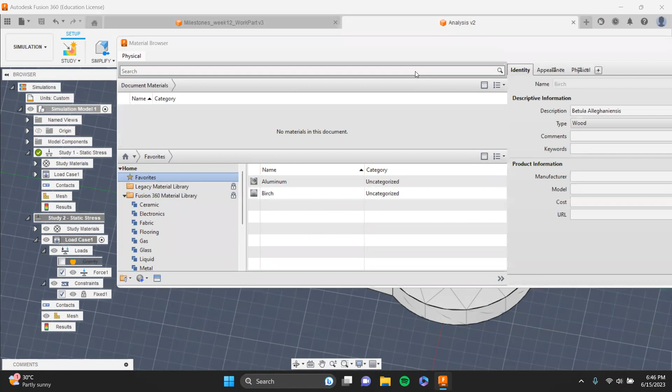Let me just go here myself. So again, here, manage physical properties. When you're here, you'll be greeted with this. Pick whatever you want here. So we could go to wood, click birch, right click here, add to favorites. I've done that already, so I'm not going to do it again. Here I have aluminum and birch. We go to birch here. You can double click on birch, and that's how this interface will show up.

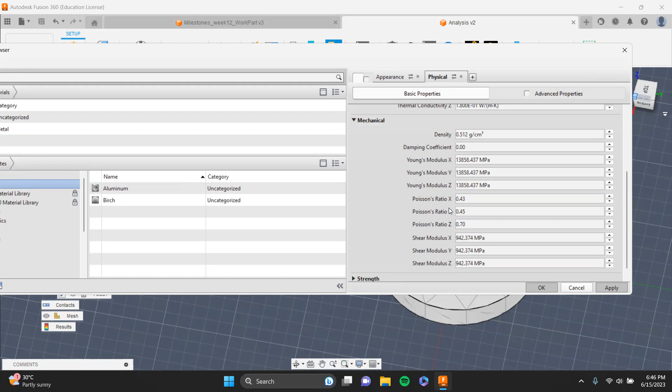That shows you the physical properties here. Like I said earlier, the X, Y, and Z are the same for our thermal properties at least. But once we go to our mechanical properties, we'll see our Poisson's ratio is different for every axis. And that's why we can't do a static stress analysis that easily, right? So how do we get around that? If we don't want to learn a lot of new things, how do we do that in a lazy and rough way? Doesn't sound very nice, but okay.

How we do that is actually by copying whatever properties we have here for our thermal expansion coefficient, specific heat, thermal conductivity, to a linear material. So here we have aluminum, which is a linear material. And how we get it to appear here as well is, again, by going here. We have our metals here. Right click on aluminum and add to favorites. That's exactly what I've done, and that's where I'm at right now. So I have these two here.

And if I double click on aluminum, actually it's already here. Cool. If you look at aluminum here, look at the Poisson's ratio, the specific heat, the thermal expansion coefficient. It's all singular, right? Because it's a linear material. So if we want to do a very quick rough analysis on birch, what we could do is take note of the properties of birch here and just edit our copied aluminum to that of birch, right?

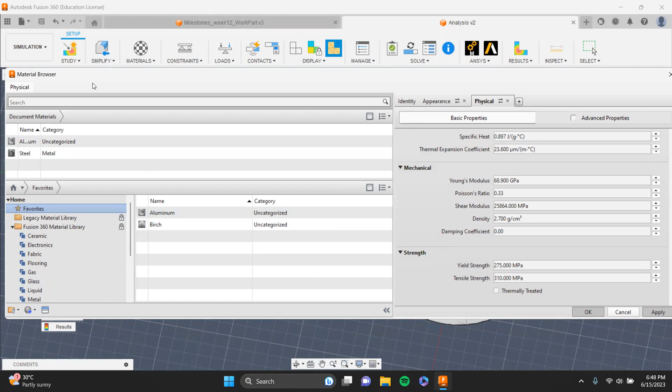And if you're worried, one thing I was worried about when I started doing this was, all right, now when I use aluminum on, say, my study here, then it'll technically be birch, right? It won't be aluminum. But that's not the case, because when you add things to your favorites, it basically duplicates it, and that's why you'd like to change the name. You could change it. But yeah, that's basically how you do a very rough estimated study on a non-linear material.

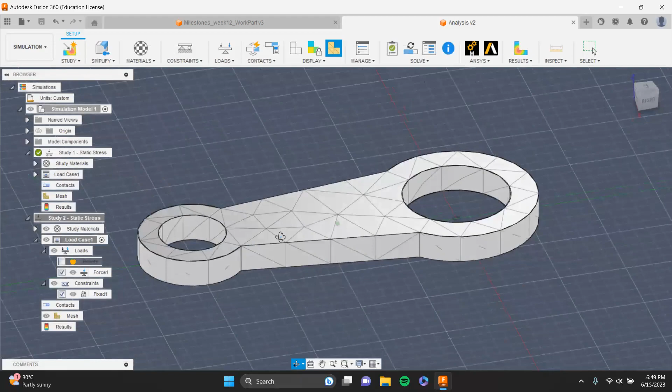For your information, you won't have any tasks that require you to do that. I just think it's worthwhile to learn about and know, and it also fills in the time because week 12 is usually very quick. But yeah, that's it. Let's move on.